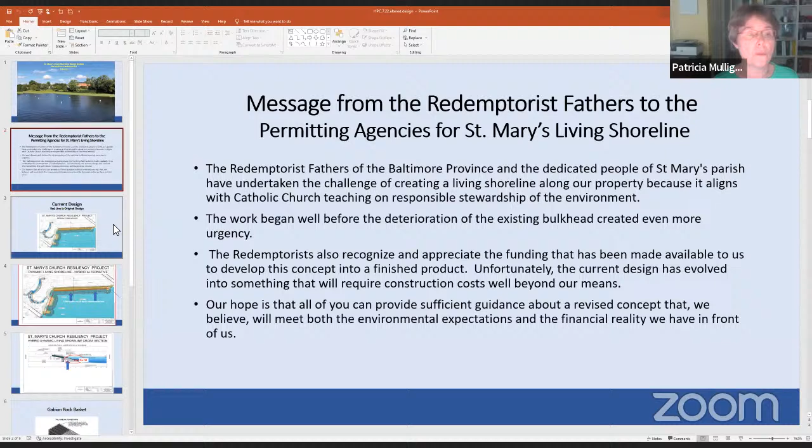We're looking for guidance, so let's go through the current design. When we left this story, you'll recall the red line on this chart, the mushroom-like shapes, is the original design concept we had brought in that would cut significantly into the historic garden, into the boxwoods, etc.

So the alternate design we came up with, responding to your request for something more linear, was a hybrid which used a marsh sill along the North Shore and retained this cove-like structure, which technically is called a headland and tombolo design, along the Western Shore, but it was significantly moved out into the creek from where it would have originally been proposed.

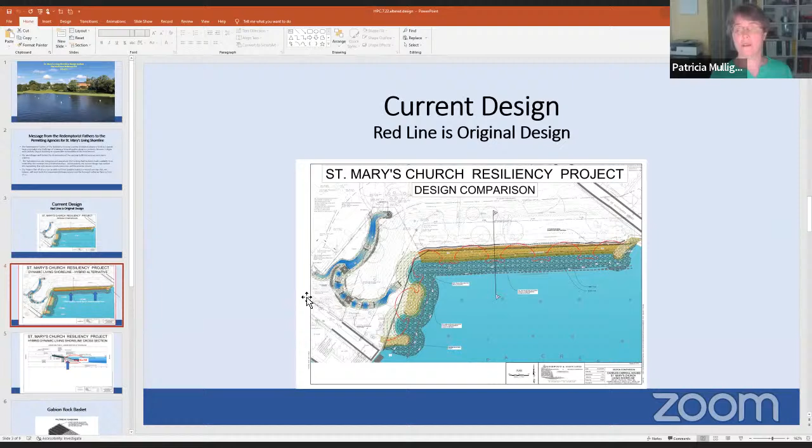Let's go to the next one. Now what we are considering is a design that can be designed to cost and live within the budget that we hope to get from DNR.

We are proposing now to take that linear design - you see the new red line on this slide. We would retain the marsh, keeping a sill, but take it all the way around, and Joe will speak to this later for more details. He has helped us with this concept. It would be a linear feature all the way along the northern and western shores.

Now you see all the detail on this chart - in front of the red line toward the creek, all those little gray circles would all be gone. The proposal is that we will build another type of wall at the point of that red line to hold the marsh in place. There's one technique that could do it, though several construction techniques could be used. Let me show a little more detail of this from the side view on the next chart.

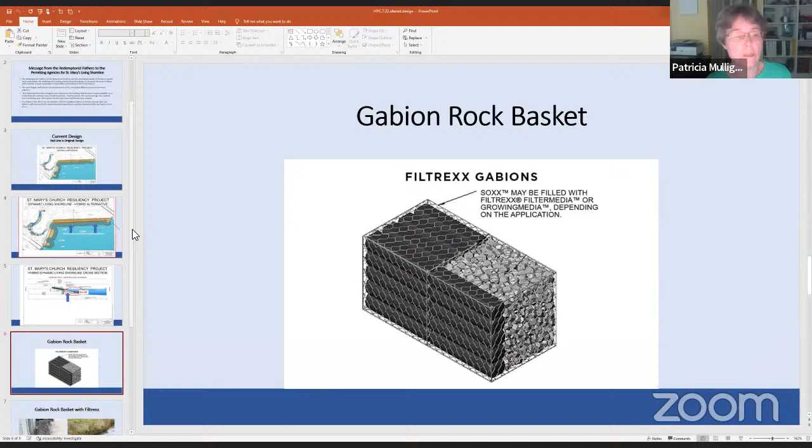And as I said, this is relatively simple. Let me come to the next thing. I'll summarize this on the next.

All right. The alterations proposed for cost control, it was really, we were factors above our budget. There was no way to control it, nor since the absolute cost also translated into a cost per linear foot that was busting all government guidelines, we weren't successful in seeking extra money either.

So the Gabion basket wall replaces a large area of the fill. The altered design keeps all the elements that in our past briefings to you, you've asked us to keep. The linear aspect. The construction is entirely contained within the 1980s landfill. There's no encroachment on the historic gardens or the seawall.

Greatly reduces the excursion into Spa Creek. One of the concerns we have with the harbor master and the port warden is the buoy array that's off, about 112 feet off the current wooden bulkhead. Possibly we won't even have to move any buoys if we do this. It's yet to be studied.

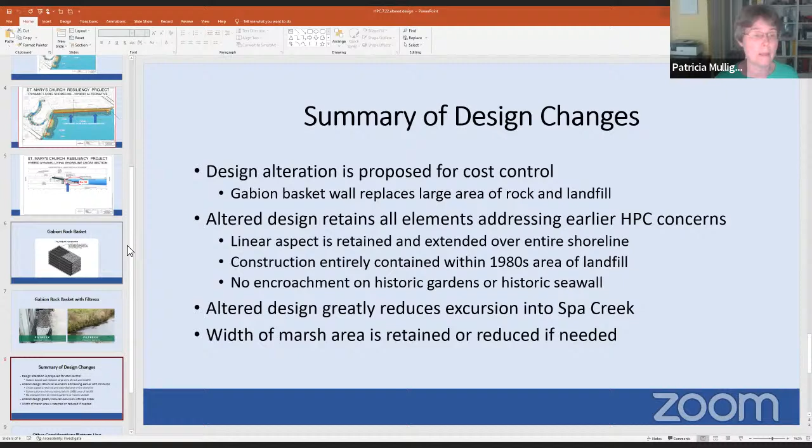But I don't mean to relay the impression that this is a baked cake yet. The use of the Gabion rock baskets has a lot of advantages. They may have some drawbacks, and we're in discussion with MDE and the Army Corps right now, and we will have to with Claudia to see if we're meeting the intent of the Resiliency RFP, which DNR put out, under which we were funded originally and hope to be funded for implementation.

But if concerns are raised that we cannot resolve on these Gabion baskets, there are other techniques that could be used, and Joe could speak to them more. You can use vinyl sheet piling, you can use rock walls, you can use other things. Joe can identify it. What we're looking for right now in talking to everyone is we need for people to identify poison pills and things that you just could not live with if we are forced to it, because we've gotten to the point where the interests of our different permitting agencies may conflict with each other to some extent, and we have to work that out.

And we'd also like you to identify what your optimal choices would be within budget constraints before we decide whether to proceed. Now, I told you it'd be a lot shorter presentation this time than last time, so really this is it, and we're here to answer questions. So please go ahead.

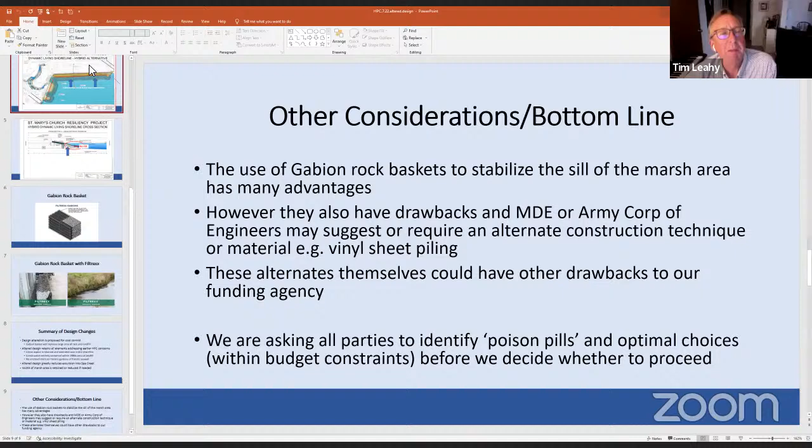Yes. All right. Well, thanks, Pat. We appreciate the update, and I think it's pretty clear. And commissioners, would you like to chime in? Maybe, Pat, if you want to go back to the plan, I guess it's page 3, maybe page 3. Okay. Up to, this is the 3, proposed. Okay. This is the proposed, 4. Yeah, clarifying questions here, commissioners?

Yeah, I have one, Tim. Either you or John or both of you could weigh in. I would appreciate it. The applicants have understandably emphasized their concern for the costs involved and what would be the best choice for them with their budget. But let me understand, and I think you and John can tell me, the guidelines under which we operate and the purpose of our review has nothing to do with cost or even the technologies. Am I correct?

Yes, we're looking at our guidelines, and they have to do with design features on the exterior. So if you meet the designs, and this does seem to be a step in the right direction, at least in my understanding of what's being presented, that's all good. But looking at the profiles and what kind of materials are going to be used beneath the water.

Well, you said something important there that I'd like to clarify, what will be below the water. I think we need to have a discussion. Pat, this would be advice for future: showing us low tide and high tide situations and what will be visible. Gabions are a different visual impact than a sloping rock wall, so we want to talk about the visual impact of a change.

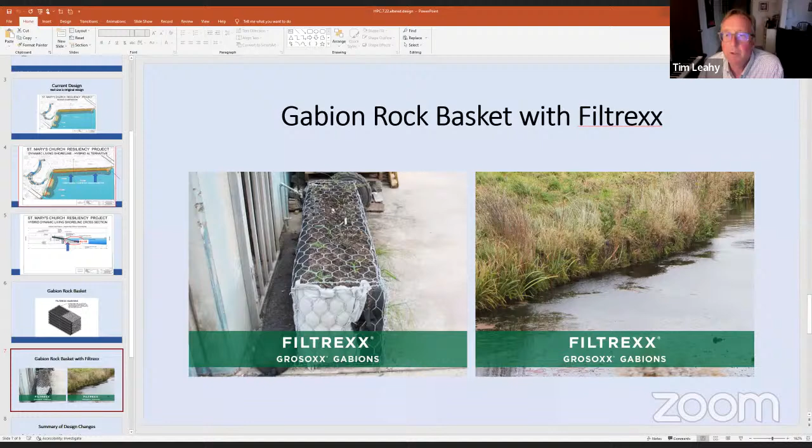Just one or two more questions. If you could go to the map, the plan again, the new plan with the red lines on it, I just wanted to clarify that. So it looks like two things: one is that there's a new feature on the west side, which is a straight line.

Do those curves go away now, or would the Gabions be in a curving fashion over there as well, or will they be straight? They go away, they're straight. So it becomes a simpler design, which I won't put words in my commissioner's mouth about, but I think we have recommended simple. Commissioners, do you all agree that would be an actual improvement? I agree.

Yes, okay, super. Oh, Bobby's joined us. Hi, Bobby, thanks for coming.

So that was one point. The other was the variable about the grasses themselves and the width of that grassy area. It seems there's going to be an area of grasses growing on the Gabions, and then that same, probably similar type of grass continues up. Yes, so that's a good assumption on my part. Yes, so the materials blend together. It's a nice width proportionally right now.

What would make you want to make it smaller? I think it's soft, the edge seems to be in a good proportion. The cost will be the only thing. The cost, okay, it seems to be a recurring thing, right?

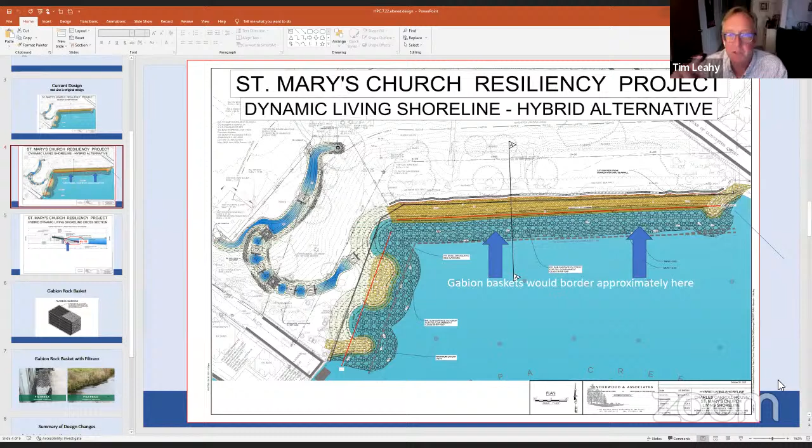Perhaps if you look at others, maybe jump to the section. I'm sorry to interrupt, but if we jump to the section we can talk about that in a little more detail. This one? Yes, thanks.

Some of the considerations that affect that waterward dimension will be federal and state permitting, because you're encroaching waterward. Water depth is another consideration from an engineering perspective, so we can make sure that it's straight, even though along the front of the existing bulkhead the water depth is not homogeneous.

It varies within 20 feet. It could deepen significantly in some areas and shallow in others, so we have to get some detailed information. That 20 feet we're estimating here is based on the amount of wetland shown in the prior concept. We're matching that, but once we get into engineering we may want to have other discussions about 20 foot versus 15 foot, et cetera.

All right, thanks. I guess my comment there is that you've done what we've asked you to do, moving it away. The historic bulkhead is there. You're cutting away the existing bulkhead and moving out. Whether it's 15 or 20 feet is probably, from your design point of view, whatever works for your design. You've complied with our major request, which was protecting the historic bulkhead and the garden. Yes, so I think you have options there.

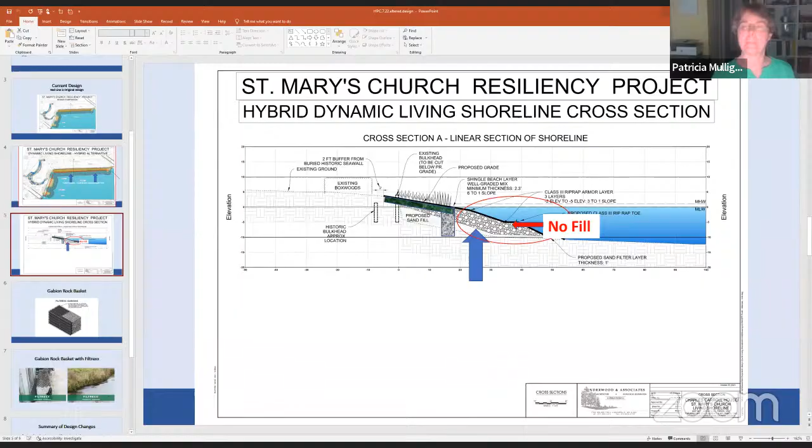Next on our agenda is another pre-application for 69 Prince George Street, the Burtis House. So Josie, if you could promote the presenters for that, please. Yep, you have Melanie, Laura, and Jacqueline, or Jackie here. Oh, great. Hello, Melanie, Laura, and Jackie. So welcome.

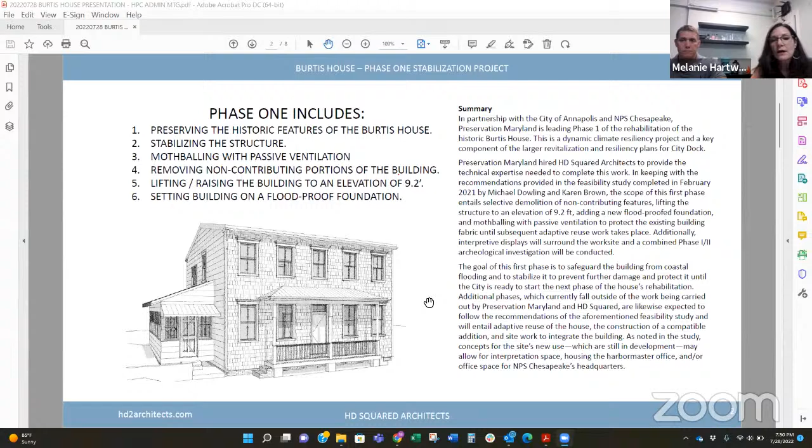So our team has gone out thus far and conducted an architectural survey. As you see here, we have some as-built drawings, and here, for those who haven't been down that way lately, are images of the Burtis house from various angles at the end of Prince George. The historic features we are really focused on preserving are the front elevation and the detailing of primarily the windows, the cornices, and such.

So there are excerpts here from Michael Dowling's structural report and feasibility study. In that report, he notes the ages of the different portions of the home to identify those critical for historic preservation versus those that are not contributing. The primary building is from circa 1886. The front porch facing Prince George is from 1918 to 1921. The side porch and back addition were later, non-contributing additions. Those are the specific portions we plan to deconstruct prior to mothballing, stabilizing, and lifting the home.

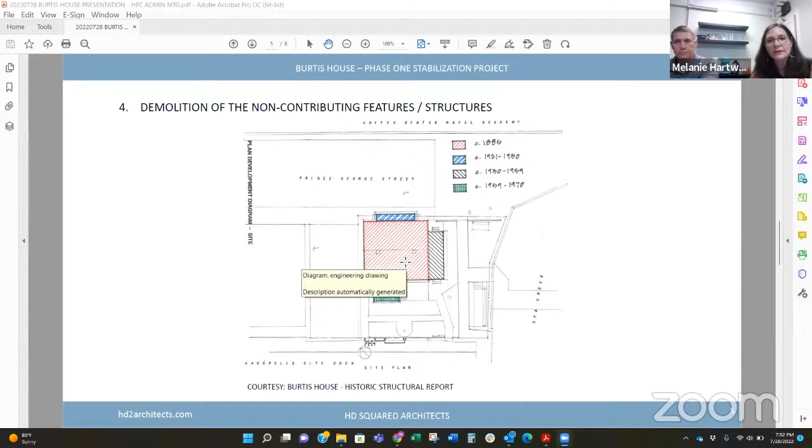I think the largest discussion we've had so far is about the ultimate elevation of the home. Currently the home is at 3.44, and the adjacent Prince George Street is at 1.2. There is significant flooding several times a year, due both to slight sea level change and sea level rise, but also to insufficient infrastructure there on Prince George Street. This is something the Annapolis Public Works staff has continually reminded us about. It's not within our purview, but it's at the top of our list—if we're going to spend the time and effort to restore and preserve this and lift it, we want to make sure that's addressed.

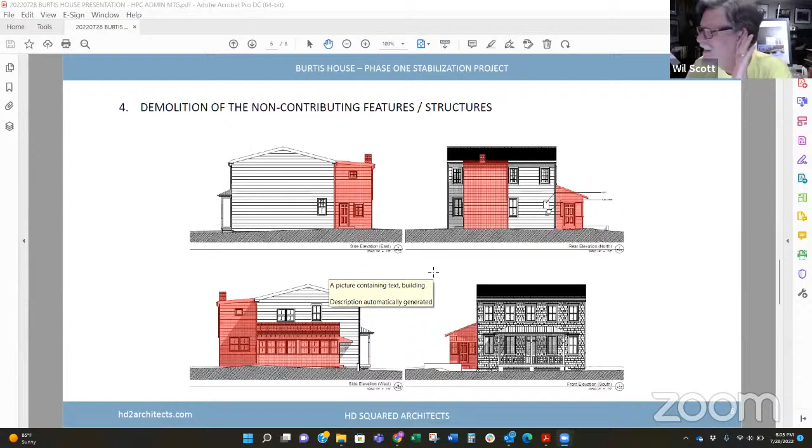Right now I assume it's unpainted CMU. I would hope we could do better than unpainted CMU. I think they've talked about wrapping it with interpretive wrapping. Yes, as long as it isn't the local graffiti. As long as there's not a new billboard. Hey, that billboard's historic, it must be, because it's still there. We digress.

Other clarifying questions, and then I'll start a conversation. Yeah, another one, Kevin. This elevation page is great, but I was hoping to see an after elevation showing if any windows or doors are going to be behind these red spots that are taken away.

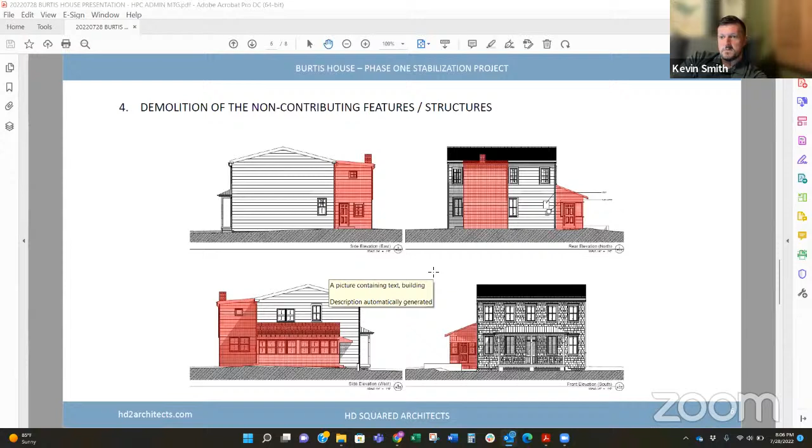We are not going to alter anything that's not already there. We will preserve the historic windows that need preserving, and add a louvered ventilation system. We're working with Preservation Maryland and their design team on that, because we anticipate the addition covering the non-historic contributing elevations in a pretty significant way.

Our job is to hold tight, stabilize it, and mothball it. It's the next phase that's really going to speak to the massing, what it looks like with the surrounding area, how high, and the proportions of the building that comes in next to it, whether it be the harbor master or some other structure, but the gateway to our city.

What Kevin's saying is, when you take off these red components on a temporary basis, what's your facade look like? Are you just going to put siding in there, or do something to preserve it? So what that design looks like will be important. Obviously it's not in this. We'll take note, we haven't gotten to that phase yet, but we'll make sure that's in our next presentation.

It'll be something that seals the structure. It'll allow it to breathe, but it will also protect it from further damage from the elements, or if anybody wants to try to get in there in the meantime, protect against that as well.

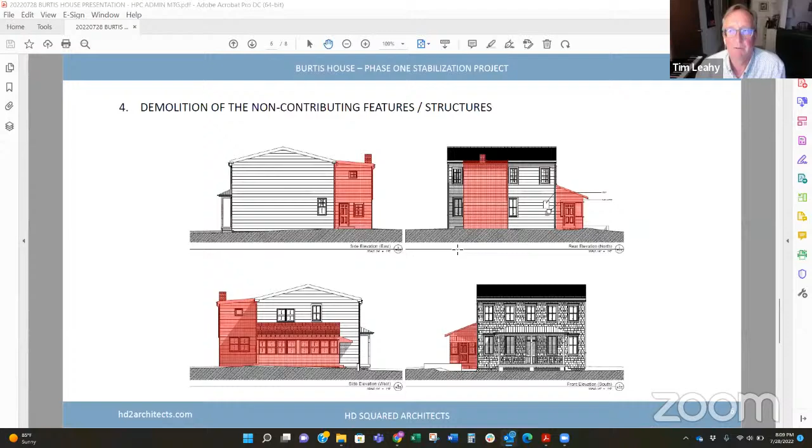A window survey would require entering the house, but at least in your next presentation you probably can give us existing conditions. I don't remember whether that was in Michael Dowling's report or not. A window by window survey will be important. These images did come from his report, of course, at least for the windows on the center elevation. I just don't know whether there's an actual window by window survey, which would be needed.

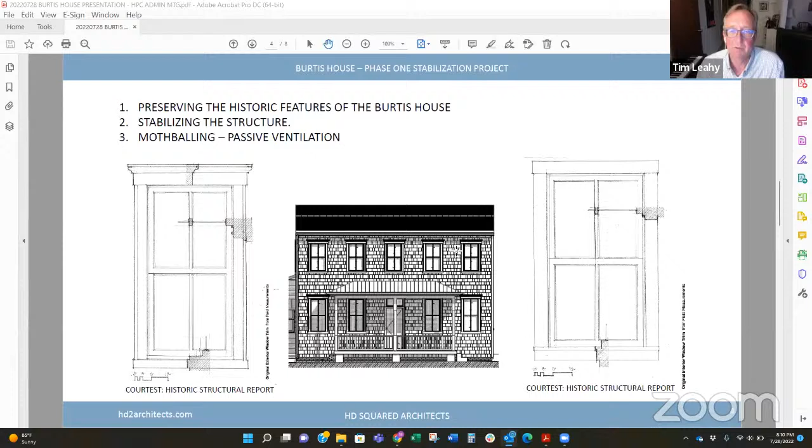We have Barton Ross on our team, and he's going to be assisting with that. But we're trying to be considerate of everybody's time, so when they come on site, they'll do the full exploration and documentation, not just piecemeal it. I agree, I'm just giving you guidance that in the eventual application, restoration is going to be recommended as opposed to replacement. Oh, absolutely.

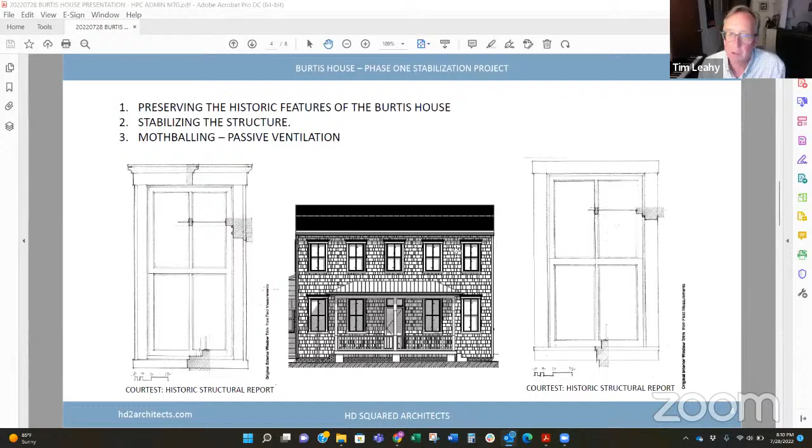All right, one more question we held for last. Could you go to the section? I'm asking for clarification: in order to comply and be consistent with the city dock design, the elevation is 7 feet. You've chosen 9.2 because the Navy recommends that, but that's another 2 feet on something that is going to be dramatically higher. I'd like to hear some justification for that, because I would say the extra 2 feet creates an additional adverse impact on this building.

So I think each of us, Laura, Bill, and I all have some input on that, but the Navy—as you know, this is the closest building to the Navy—so there's a balance of what the city of Annapolis is doing versus what the Navy is doing. The 9.2 is not set in stone by any means, but maybe Bill can speak to the wave action and anything else that might come. Certainly if we're making the investment and aesthetically we can work it into context with phase 2, then the higher the better, from a resiliency standpoint, but maybe Bill can say more to that.

Right, so the 7.0 is the flood protection elevation today. The Navy study looks farther into the future, taking both sea level rise and subsidence of the land into consideration, and that's where they're really coming up with their 9.2.

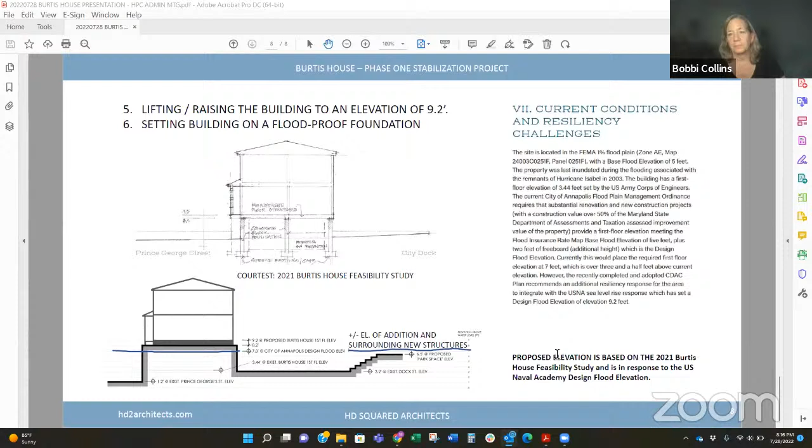Tim? Yeah, Wil. I think Bobbi just made a good point. We need to consider what the ultimate impact will be. But to that point, I think I've made clear how ugly I think the field house is.

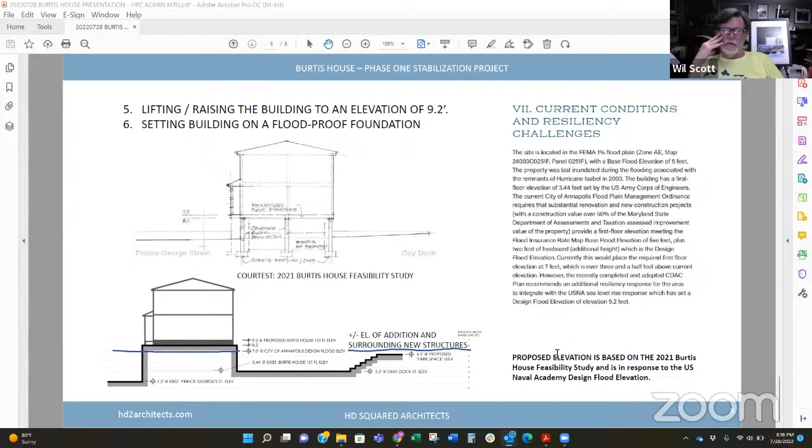Since we're talking about raising it 2 feet, that seems to be what we're discussing right now, the difference between 7 and 9, an extra 2 feet. Given the proximity of the field house and the fact that this 2 feet variation seems driven by sea level rise concerns, I have no problem discussing it. Unless I saw something very shocking and inappropriate, I could support that.

Okay, so you're saying in the scale of the streetscape, 2 feet is not a big deal? No. Okay, I understand what you're saying. That's a valid point, that's the conversation we're going to have eventually.

Yeah, eventually we're going to have to talk about all these. It's a permanent addition, right? Once it's built at 9 feet, it's going to stay there, whereas if it's built at 7 feet, it could be moved to 9 feet. Or if it was built at 9 feet, it could probably be taken down to 7 feet if there was ever a reason, though I wouldn't reverse that from a cost point of view.

We don't really know, we're kind of casting a straw, so I thought I'd raise the issue. We don't really know what the design is going to look like. It does create a new baseline for their design when they get to it at 9 feet, if they're designing at 7. That's just the point.

And then this trench, what we see here, we've already talked about how this is going to be handled in that design, but that's not this project. Right now I guess this is a transitional project for this phase. We're seeing the idea that it will be a bit of a tower surrounded by a wall with interpretive panels for 3 to 4 years, probably.

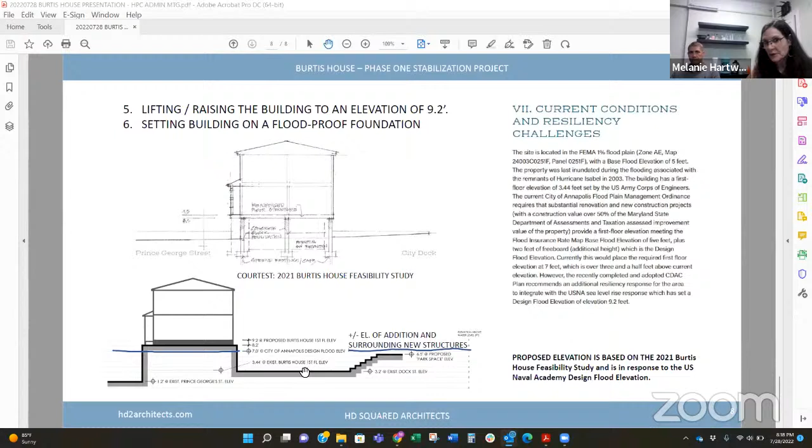I'd like to make one clarification about this, because I know it does look like a trench in this section, and that's how, in my mind, I needed to work through the different elevations at the time. No, you're right, but the Burtis House doesn't actually sit at Dock Street. I know, it's down here at the end where there's a proposed elevation of about 6.5 here. So it really does depend on what's going to happen in this section.

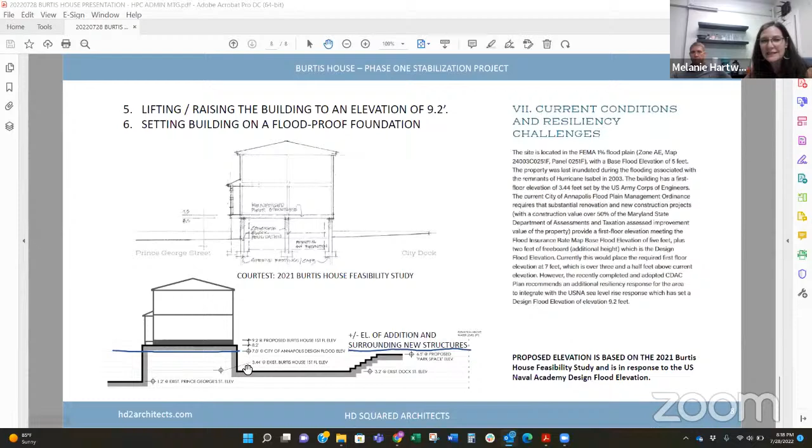Good point. The addition, the walkway, and the connection to the park. I do not expect the ultimate phase 2, and the surrounding city dock revitalization work, the extensive work being done, I don't expect this to be the reality. It's just something I worked through in my head to understand. Understood, I understand, more there.

Okay, so we're dealing a little bit, but if you're working together with them, then in your next presentation, if we've gone further and they're still in pre-application mode too, so we don't know what a section would look like at this point, although we saw one the other day.

I also want to think it's important to work with the Navy. Opening up gate 0 and completing the landscape design of that whole section, I would hope someone can really take ownership of. It's a little bit in no man's land right now, but I would hope that can be included in this project as well.

What is the current elevation of the waterside walk at Burtis House? Do we know, are we looking at about 4? It's about 4, give or take. So that's the floor level of the first floor. Is that what you're asking, Bill? It's above the first floor, because Burtis sits in a hole all the way around. Yeah, yep, oh okay. So the dock right now, the walkway dock is at 4 feet, and then Burtis steps down.

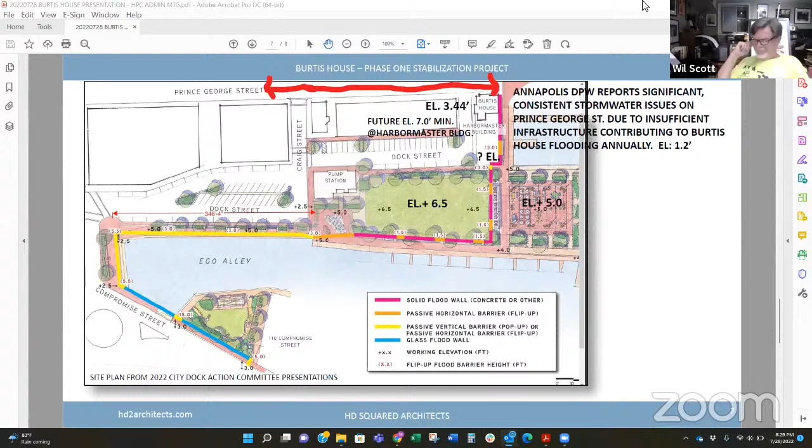So that was it. Tim, did anybody touch on outdoor dining at all?

No, really? No, because it's a hot potato item. Yeah. No, they didn't, and I didn't bring it up.

I think there wasn't too much discussion of the pandemic in general and its impact as an emergency. There was a little bit of it, but no one really did that. So I think we're on the right track there.

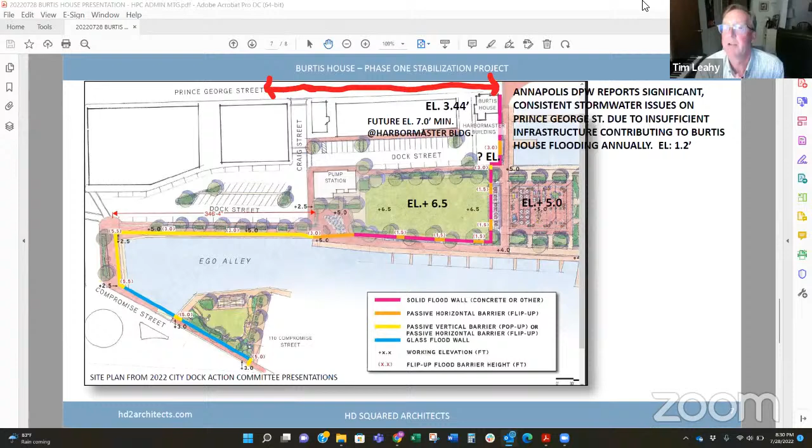Any other thoughts, questions? We can transition a little bit to John's next topic. John, you can give us an update on how outdoor dining is going, I know you're working hard on it, looks so much better than it did.

Well, let me give you a little history here. And then we're going to talk about one more thing after that, John, this is John's topic, having to do with rooftop antennas, utilities in general on rooftops, which have really become an issue.

We talked about it, I'll be brief about it, but we approved with conditions the new windows at 163 Main Street. This is just to give you an idea of how the back and forth goes. So I sent an email to the manager of 163 Main Street saying, that's Acme, right? The Acme, right. These are your conditions, and you'll have to comply with the fixtures and furnishing guidelines.

Keep in mind you'll have to create an application for administrative approval. And the response was, 'Is this email a joke?' One line, not hello, not dear John, nothing. And there's a little bit of back and forth.

And now the architect, Joe Mayer, is wondering where the permit is. And I had to remind all parties that the conditions haven't been met. I hope it's not a surprise, 'is this a joke?' But he's not getting his permit until we get an application for his fixtures and furnishings.